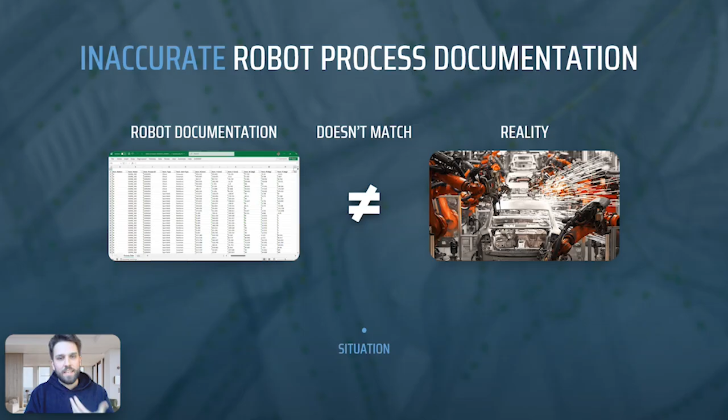And we learned the hard way that robot documentation almost never reflects reality. And I'm sure that sounds quite familiar to you. It's just the standard situation and it's frustrating for a lot of people. Yeah, but why is this a problem? Or is this a problem at all? Well, it is. In our experience, the impact of inaccurate robot documentation is significant and often underestimated.

So imagine the weld names or IDs, or however you call them, are different in the robot than in the documentation, or the glue parameters are wrong. If that's the case, a small change to the weld or glue controller or to the robot suddenly causes serious production errors.

In German, we actually have a word for this, verschlimmbessern, which means making something worse by trying to make it better. So in order to solve a problem, you could introduce a second one, or a weld disappears for certain variant combinations. We've seen this surprisingly often. The worst case, of course, is the recall.

And once an error shows up, it's often not easy to trace it or to fix it because nobody really knows when the error has been introduced. So nobody really knows which bodies are affected. And to analyze the problem, production usually needs to be stopped to guide the robot manually from point to point for root cause analysis. Takes forever, is highly complicated, and requires specialized staff.

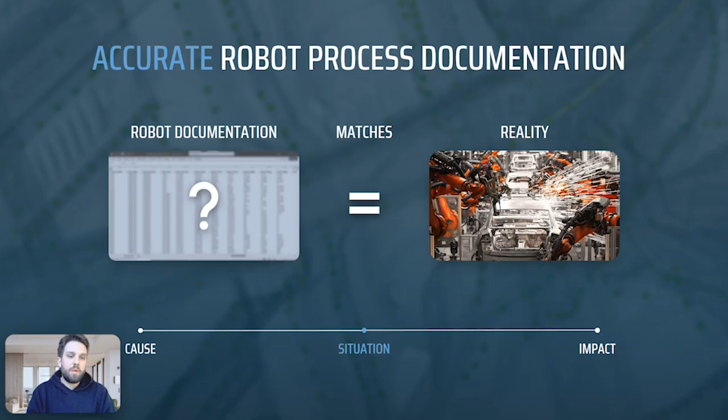To understand the requirements for such a documentation, we more or less just have to flip the problems we just discussed. So instead of inconsistency, we want consistency. We want our documentation to be consistent, always the same, regardless of who changes or analyzes which data, when or where. One standard, one source, one system.

Instead of inaccessibility, we want accessibility. We want everyone to have the easiest possible access to the data in a way that even untrained staff can understand it. This means we need a way to handle even the most complex frame issues. We need to solve this because at the end, it has to be simple.

And we want to minimize the manual effort as much as possible. Nobody has time to analyze robots or to keep track of changes manually. We need automatic documentation and evaluation. That means automatically extracting data, analyzing it, detecting deviations, and distributing it throughout the entire plant. And we need to be able to easily understand changes over time. So we need something like a timeline.

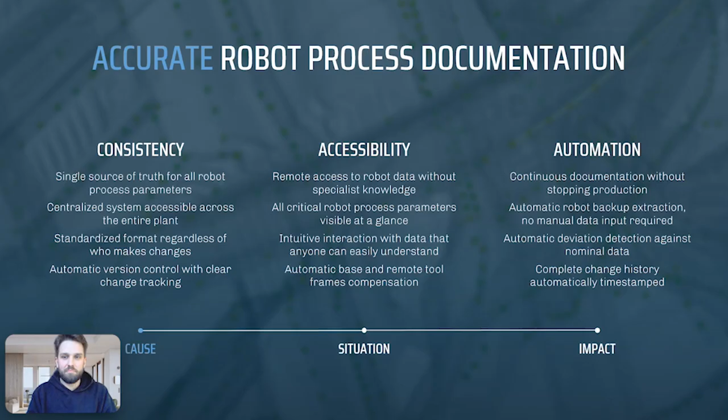That's why we built, we call it RoboLive Visual, which is an Industry 4.0 tool that visualizes all joining positions and robot parameters automatically. I mentioned in the beginning that we started on this back in 2020, so we already have a solid understanding of how this impacts weld shops, body-in-white environments in practice.

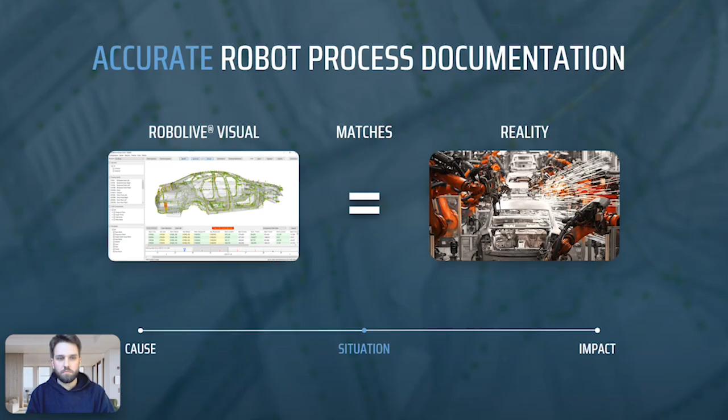To emphasize the contrast, I'm referring to the slide we already had earlier again. So without an accurate documentation, small modifications quickly turned into major problems. Having an accurate documentation, we can clearly see that it's much easier to plan and verify adjustments. As a result, the modifications actually have their intended effect. Imagine making adjustments to the weld controller based on up-to-date weld IDs, for instance.

And if issues come up, they can often be identified before they affect the actual production and solved much more easily. There's always a clear record of when these issues were introduced and a clear visualization of their root cause. And also integrating a new model is significantly easier having all relevant information available.

We estimate that we can reduce the manual effort for robot data management by at least 75%, that we can cut unplanned downtime due to robot programming issues by half, and reduce scrap by 50% as well. Of course, scrap that is caused by robot programming issues. To sum this up, in our experience, accurate robot process documentation can increase OEE by up to 3%. In LCV production, that number is even higher.

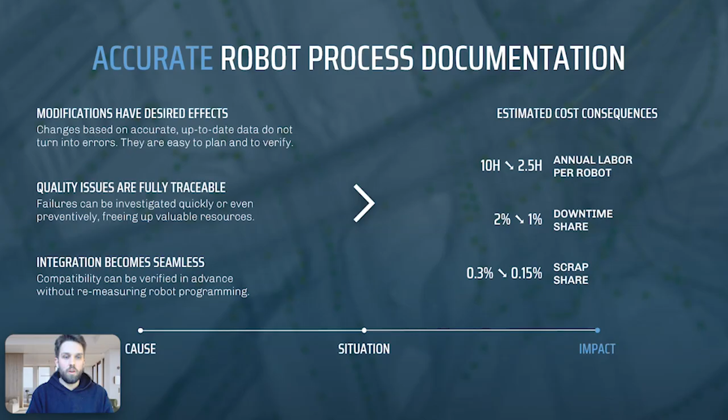Okay, so that was all very theoretical. In the next step, I'd like to show you how we actually do all this. Right, so our technology is able to extract all the relevant data completely automatically. We just need robot backups from any robot, KUKA, Fanuc, ABB, Yaskawa, to name a few. This data is then analyzed and integrated in a custom client. And this client can be installed anywhere, which means everyone has access to RoboLive Visual from anywhere, and anyone is able to evaluate robot programs in seconds.

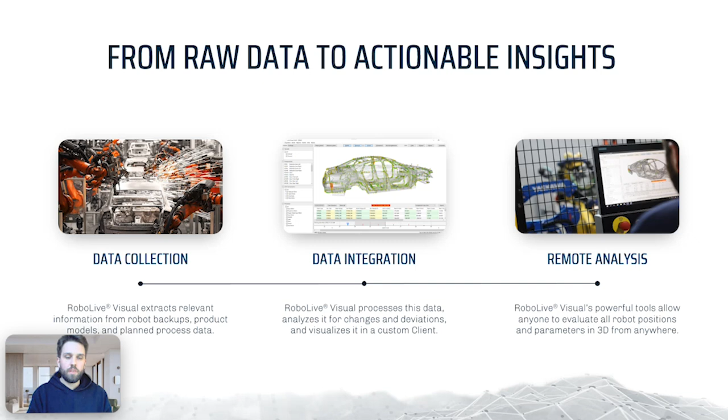To make the evaluation as simple as possible, RoboLive organizes all data and visualizes every joining process in a 3D environment. We use the product CAD to accurately position all the processes, so it's even easier to understand. And with all the processes, I mean literally all of them, all kind of joining technologies, spot welding, gluing, hemming, clinching, gap filler, you name it. With the visualization and with the filtering options, variants and line overview, the parameter table, anyone can easily filter by robot, search by process name, and whatsoever.

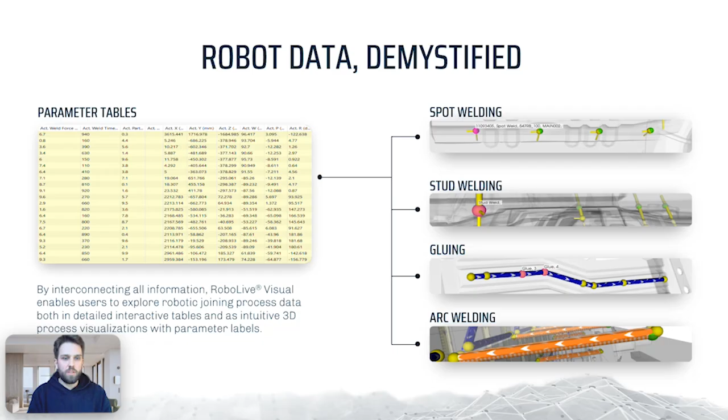So RoboLive is able to visualize a lot of important information. Like I just said, the joining positions over here, but also the tool orientation, for example, to trace changes to the weld angle, but also seams like laser and glue, including their directions. You can see the little arrows. And by using what we call labels, RoboLive can also display any other robotic parameter directly in 3D. For example, movement points, order, glue program, weld ID, whatever information the robot contains. And all of this can be analyzed interactively in 3D from anywhere.

To make the analysis even easier, RoboLive automatically detects and highlights deviations. So incorrect process positions, for example. Of course, we can define a custom tolerance. The worst case, deleted processes, which, by the way, happens surprisingly often. Incorrect process names, which is a very good example. It's crazy how often a robot programmer copies and pastes robot code and forgets to change the process names, and suddenly there are mixed or multiple used IDs, which eventually lead to faulty modifications, like I mentioned earlier.

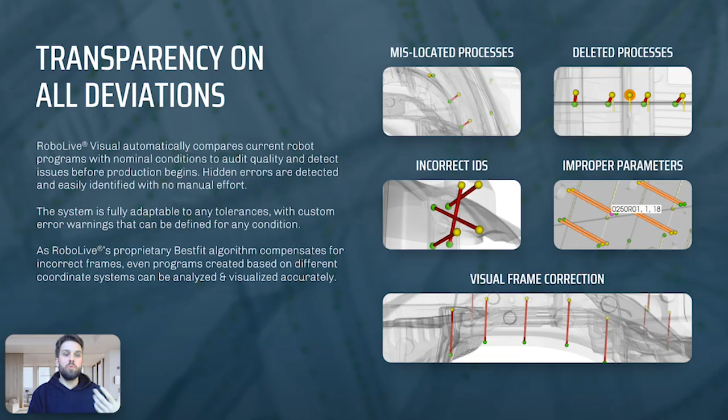Without RoboLive, analyzing the actual robots doesn't really make sense. Simulation isn't useful either. So most manufacturers just start production and hope for the best. With RoboLive, it's just 2 clicks and everybody knows what has been changed and if those changes are how they should be.

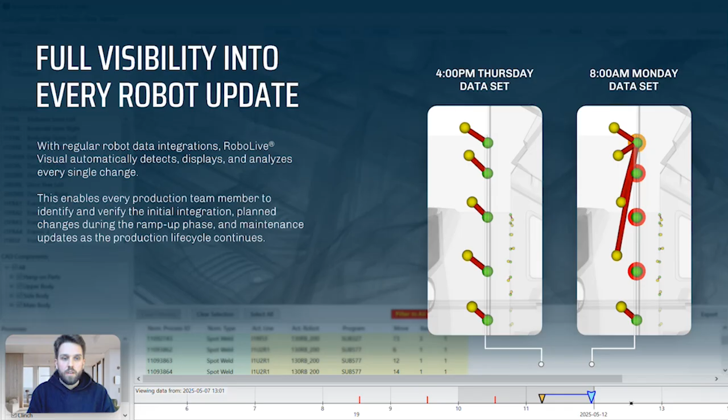And of course, this is similar during the entire commissioning phase. RoboLive automatically detects which robots have been newly programmed. If there is an issue, you will immediately know about it. And you always know exactly the progress of the entire robot integration. This way you can make sure the contractor delivers the ideal robot programming by start of production, because you can show them the errors visually. And I can tell you they hate this because they lose the blame game.

Yeah, and this is how RoboLive has a different impact on all phases of a production. So ramp up is easier because everyone can make and verify data-based decisions. Maintenance is way easier, of course. And I already talked about planning, designing, integrating new models into an existing production.

Ideally, of course, RoboLive is used right from the start, but it also makes sense to set it up for a production that's already running, either as a one-time analysis to detect hidden robot programming issues, or as a running on-site system. For example, one customer recently purchased RoboLive for a model that was close to the end of its production life, simply to make the planning and integration of the new models as smooth as possible.

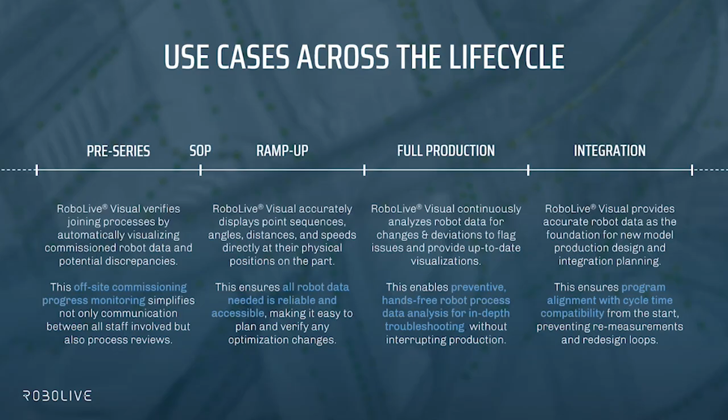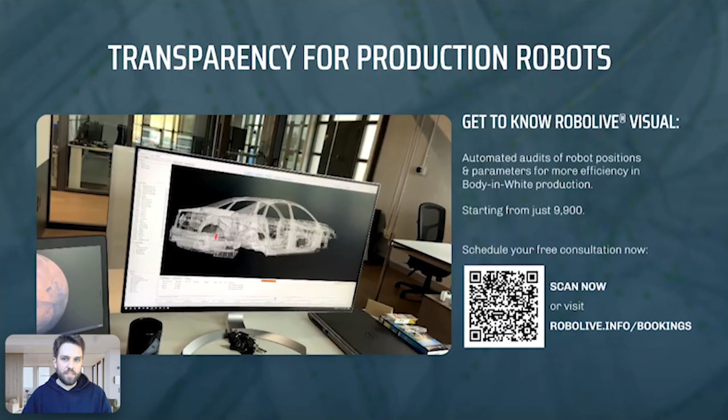Okay, so to wrap things up, documentation of robot processes in body in white is almost never accurate. Nobody really knows who programmed which robot, when, or how, and if it's like it's supposed to be. This creates a huge amount of manual effort and unfortunately has a negative impact on production quality.

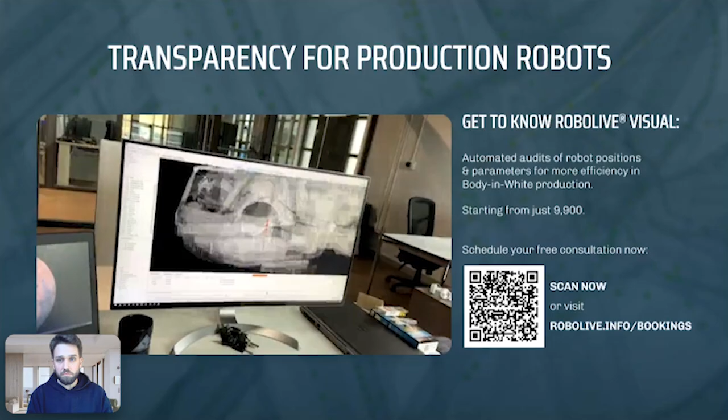Which is why we developed RoboLive Visual, a system that automatically visualizes joining positions and robot parameters. This works in any environment with any robot, any joining technology, and any standard, and it's available from 9900.